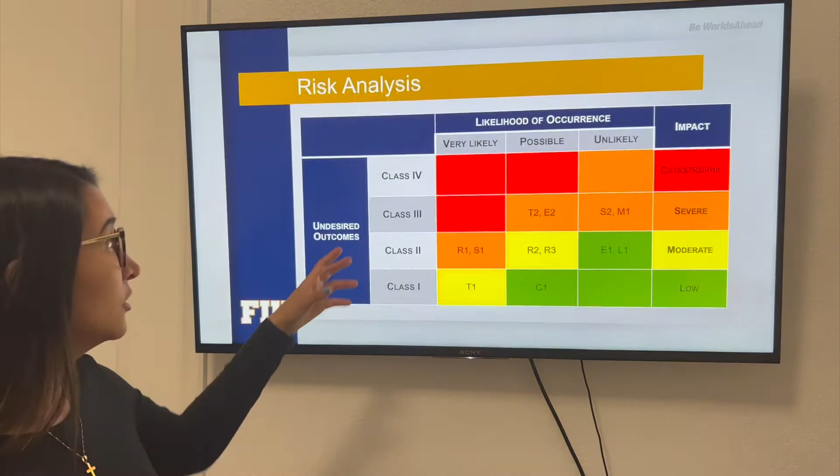We gave these risks different classes depending on how much impact they have on our project and how often they appear. We used all this information to create this risk exposure table, where we compare how likely a risk is to occur and how much impact it has.

With this table, we can conclude that resources, schedule, technical, and marketing have all at least one risk in the severe category. The team, after this information, came together and found action plans or ways to react if any of these risks occur.

After all of that, we conclude that active monitoring is critical during our development stage. As a team, we need to allocate enough time not only for the expected development of the project,

but we also need to allocate some time for troubleshooting as necessary. With all this concluded, I'm now going to pass to my teammate Renee, who will talk about our action plan.

Good afternoon. My name is Renee Arquet, and I will be going over the plan of action. A plan of action is essential for any engineering project because it's where all the organization takes place that allows

the project to be finished on schedule and efficiently. So for our plan of action, you can see here we have a statement of work, a work breakdown structure or WBS, a Gantt chart, and a program evaluation review technique or PERT chart.

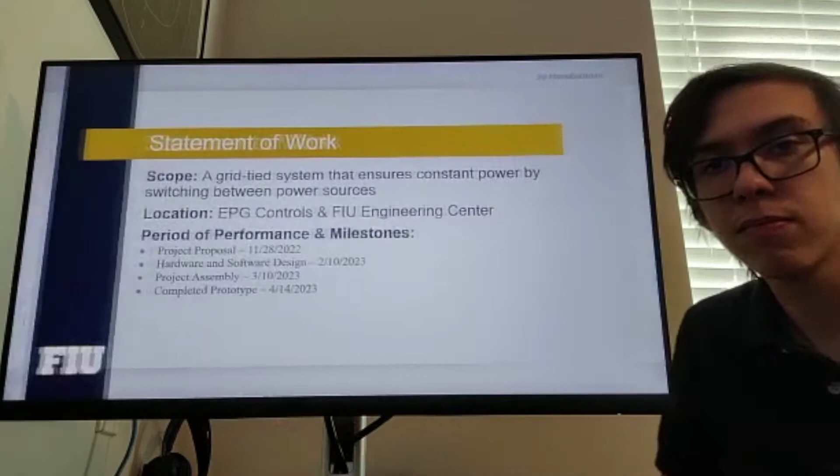The statement of work is a detailed outline of the project. It goes over the scope, the location, the period of performance, all the deliverables and when each thing is due, as well as delegates responsibilities to each team member.

So you can see here our scope of work is a system that can reliably provide power to a load by switching between power sources.

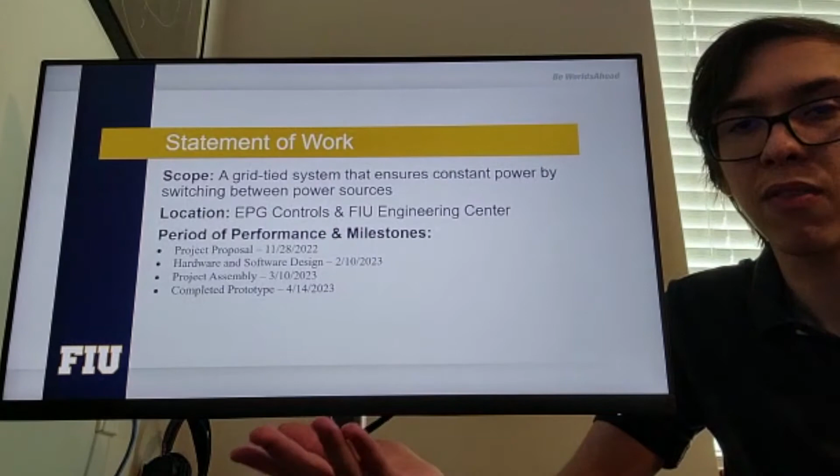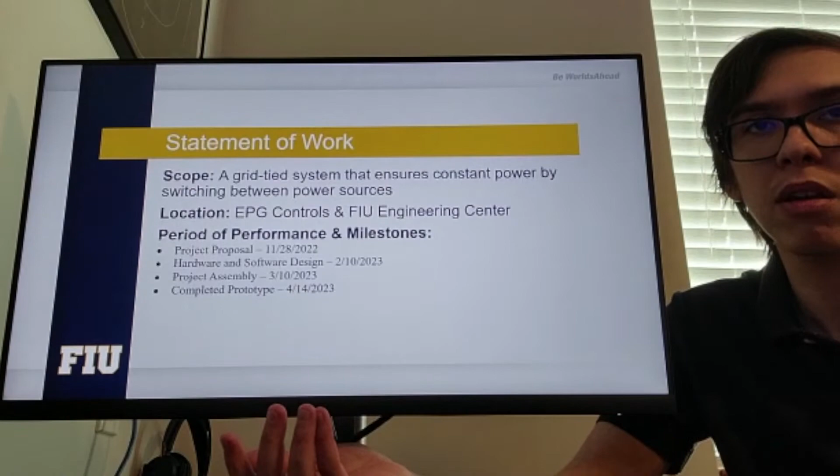Here is the work breakdown structure, or WBS. It's essentially a chart that maps out and breaks down the project into different phases, and each of those phases is made up of multiple tasks. It allows the team to visualize what needs to be done in order to complete the project.

If you can see here, each task is made up of a percentage. It basically shows how much that task contributes to the completion of the project, and these add up to the percentage next to each phase, and these add up to 100%, which will mean the project is completed.

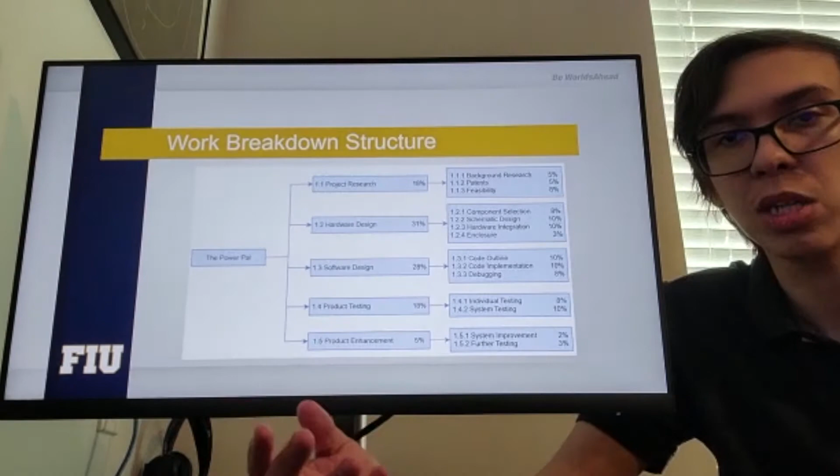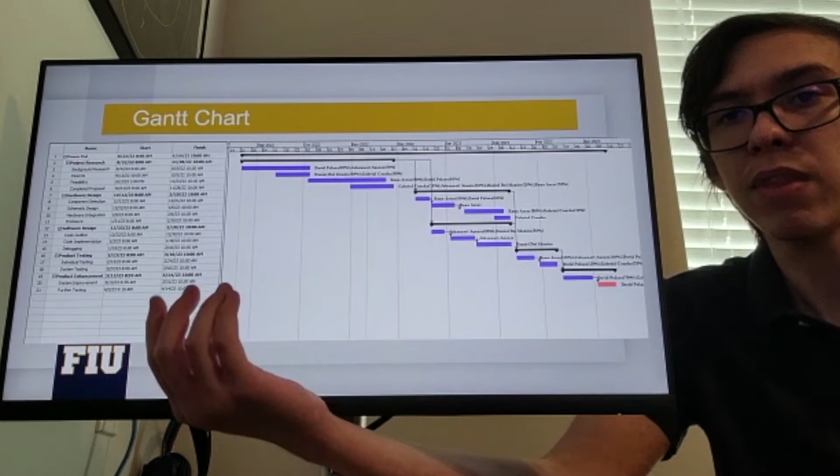So if you can see on this timeline, we have team members next to each task and phase, and this here is where the due dates are assigned to each task.

So this is our plan of action, and next you'll be seeing Daniel DeMonico.

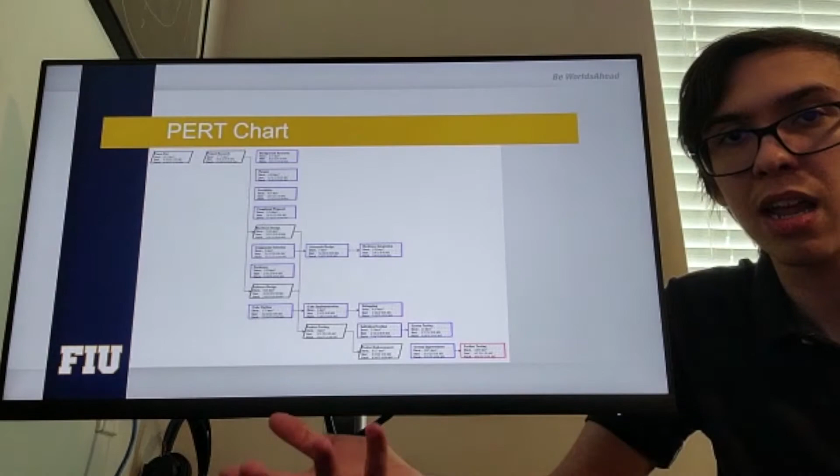Thank you. Hello, I'm Daniel DeMonico, and next I'm going to discuss the multidisciplinary aspects of our project. As society continues to advance, being able to work on multidisciplinary teams becomes much more relevant. As engineering students, it's our responsibility to be able to work and communicate within multidisciplinary teams so that we can succeed in our roles as engineers in the future.

Next, I'm going to discuss the personnel on our team. Our team consists of 5 electrical engineers, all with different areas of specialization, which is very important for this project because there's a big software and hardware aspect to it, and we're going to have to integrate the two aspects together.

First on our team, we have Renee Arquet, whose concentration's in power systems, so he's going to be a hardware lead on our team. Next, we have Joannette Aponte, whose concentration is in control systems. She's going to be the lead software engineer for our team.

Next, we have Daniel DeMonico, whose concentration's in embedded system software. He's also going to be a software lead on our team. Next, we have Gabriel Concha, whose concentration's in power systems. He's also going to be the hardware lead on our team. And lastly, we have David Pelaez, who is the team leader. He's going to be the project engineer for our team and assist in both hardware and software development.

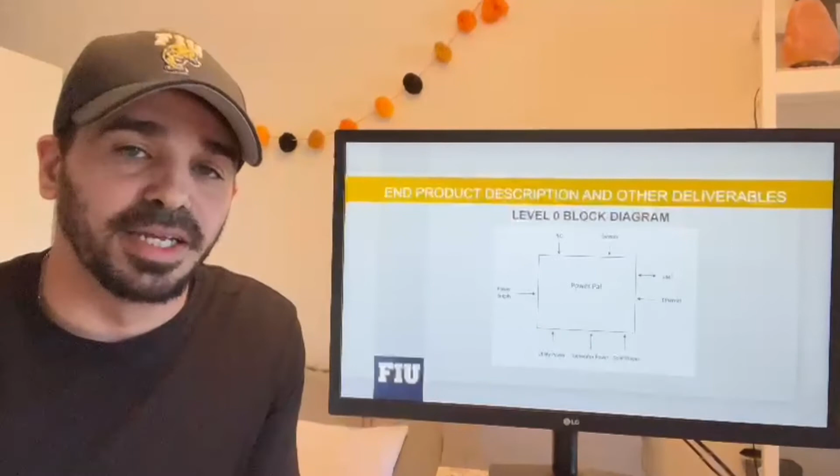Hi, my name is David Pelaez, and I am presenting on end product description and other deliverables. Here on the screen, we have a level 0 block diagram. This displays a general outlook of the PowerPal and how it operates.

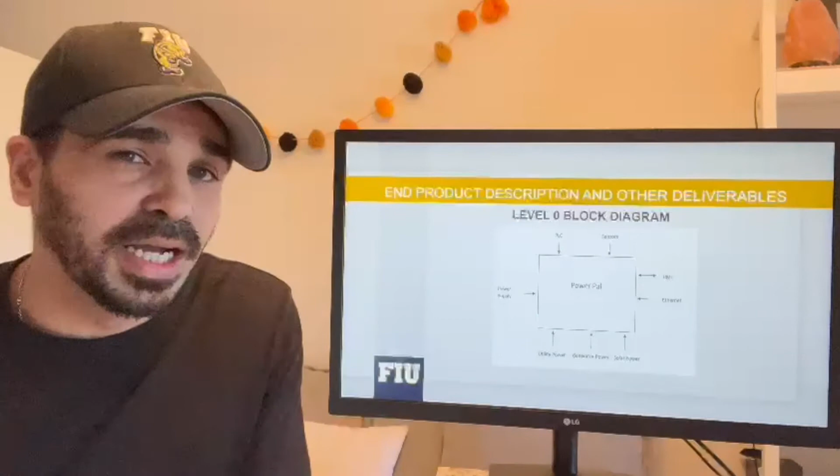As you can see, we have a programmable logic controller. Attached to it, sensors, a human-machine interface, an Ethernet cable, which will provide communication for the PLC and the HMI, 3 sources being utility power, generator power, and solar power, as well as a power supply.

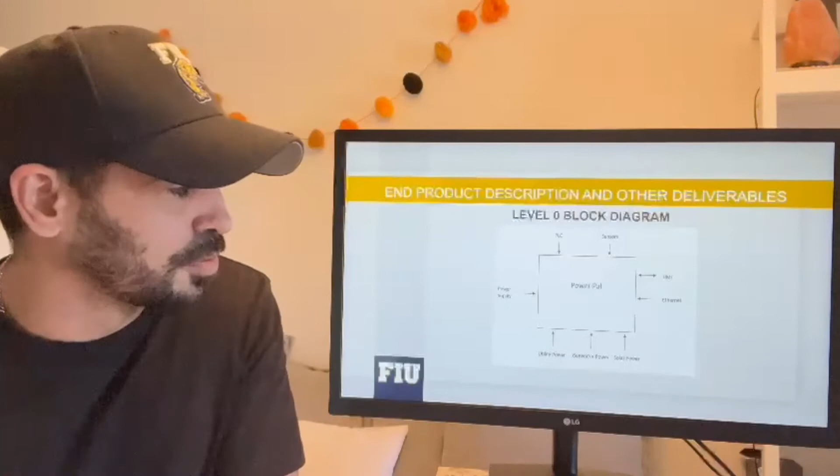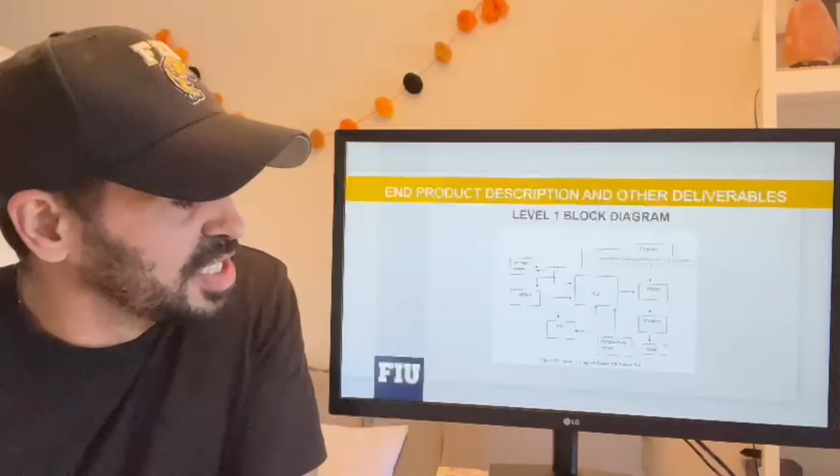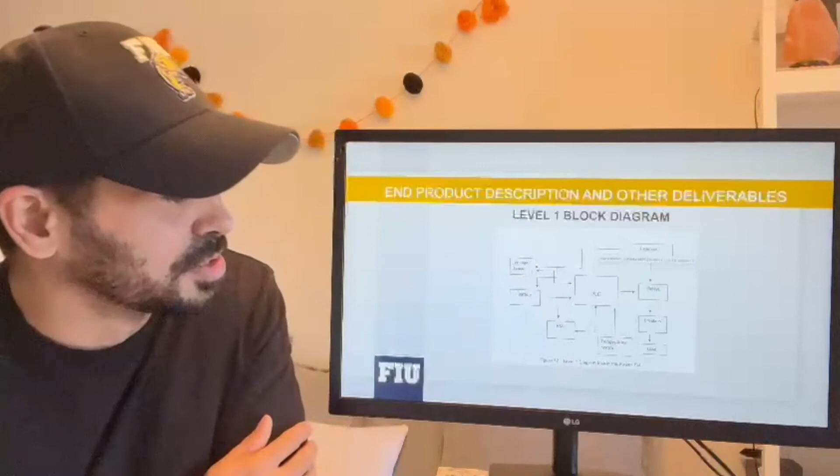Here, we have a level 1 block diagram going further in detail into the operations of the PowerPal. As you can see here, we have a battery which will be sending a signal to the programmable logic controller and human machine interface. We have a voltage sensor that will be receiving the signal from the 3 sources, and the voltage sensor will communicate the readings with the programmable logic controller.

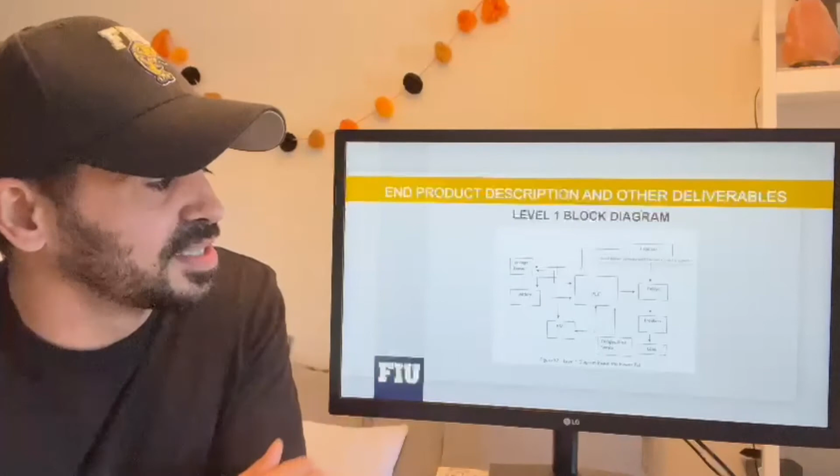The programmable logic controller will be sending signals and commands such as open and close breakers to the relays, as you can see here.

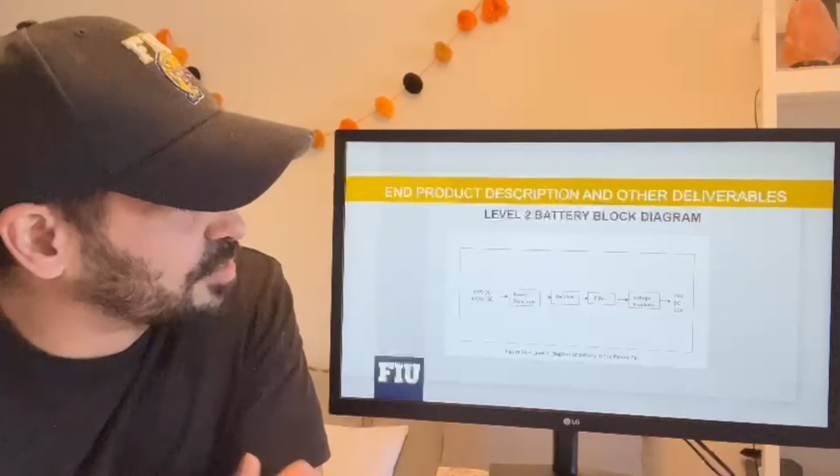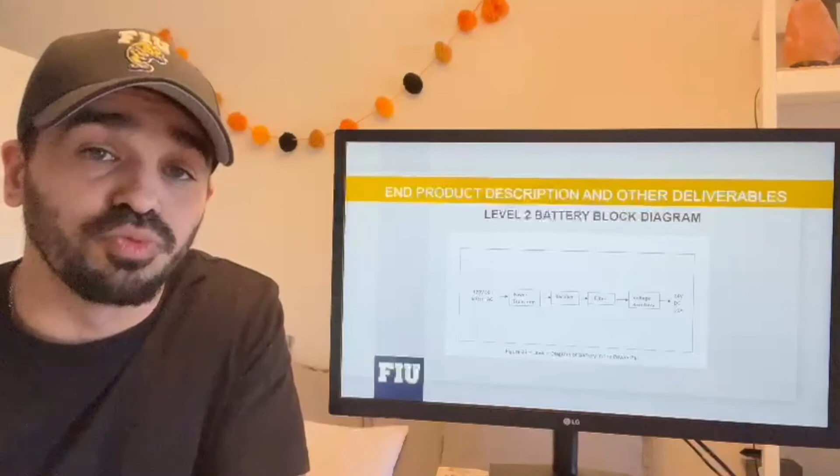Here we have a level 2 battery block diagram. So our battery is going to receive a 120 volts, 50 through 60 hertz AC signal. We're going to step down that voltage, rectify the AC signal, convert it to DC, and filter it to get a smooth DC signal, and then regulate the voltage being 24 volts DC output.

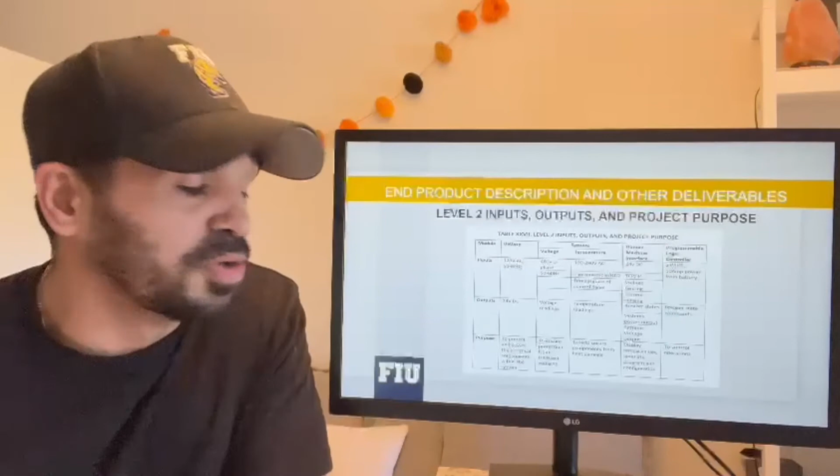Here we have a table providing further details of like amperage, voltage of each module. So for example, here we have the battery, which will have an input of 120 volts and an output of 24 volts DC, a voltage sensor, which will be sensing 480 volts from the sources, 50 through 60 hertz.

It will output voltage readings, a temperature sensor that will be taking the temperature of the enclosure, a human machine interface, which we will be inputting a 24 volt signal, also an Ethernet, and we will be outputting on the screen displaying the breaker states, critical values such as voltage and power.

The programmable logic controller will have an input of 24 volts DC, and it will be outputting commands such as open and close breakers.

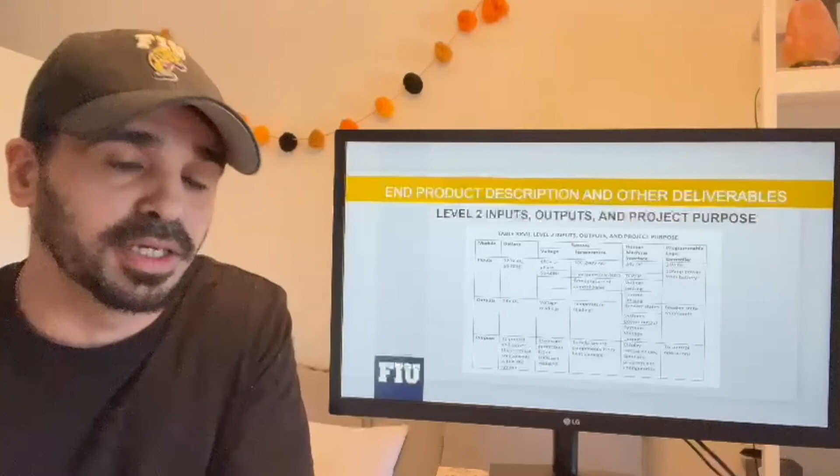Other deliverables that we will be providing to the users will be things such as a user manual, video presentation, and a final report.

In conclusion, we have covered globalization, standards considerations, feasibility analysis, risk analysis, plan of action, multidisciplinary aspects, personnel, budget, and end product description. Thank you, guys.